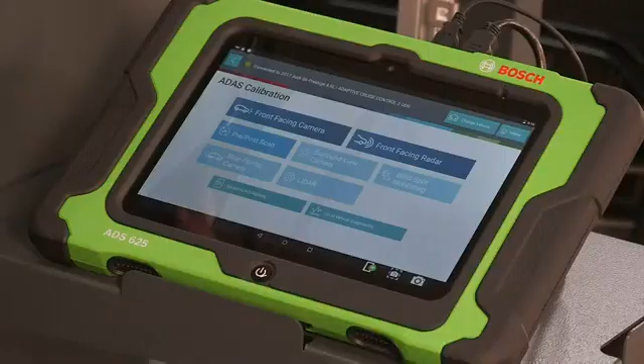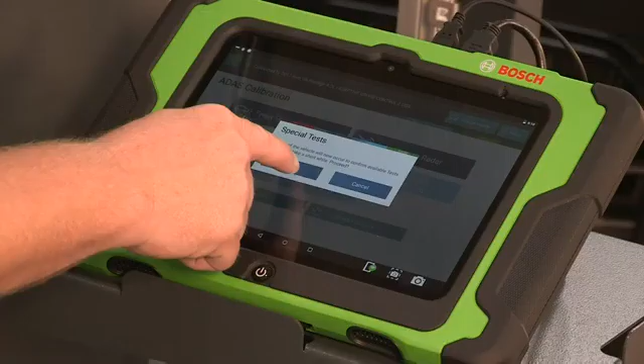Let's learn how to do a front-facing radar calibration using the Bosch DAS 3000 and the ADAS 625 scan tool. The scan tool will now scan the vehicle to determine which tests are applicable for the vehicle. Press OK to continue. Select ACC sensor adjustment to calibrate the adaptive cruise radar.

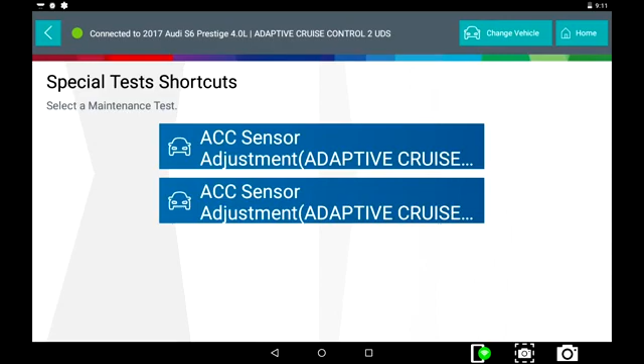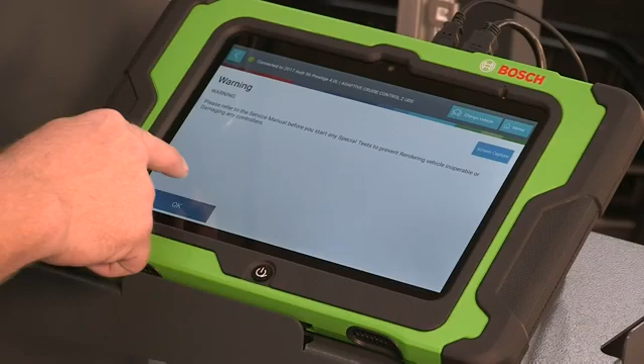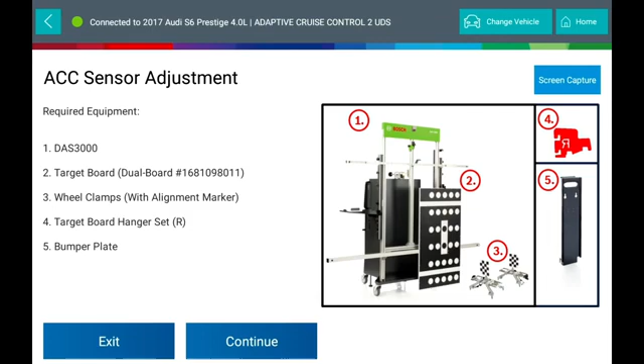Refer to the manufacturer's service manual for applicable warnings and follow these to prevent disabling a system. Press OK to continue. You will need the following equipment to perform this calibration: DAS 3000, target board, wheel clamps with alignment markers, target board hanger set, and bumper plate. Press continue to proceed. Before you begin the calibration, turn the ignition key on with the engine off.

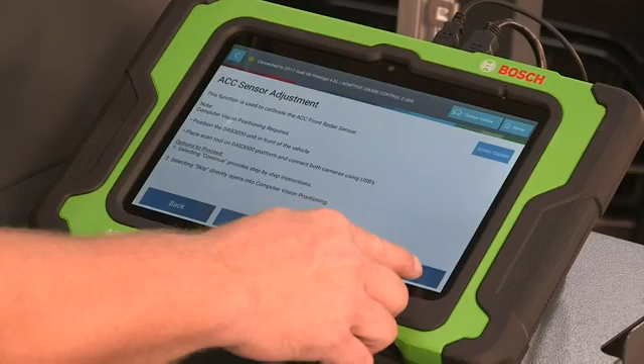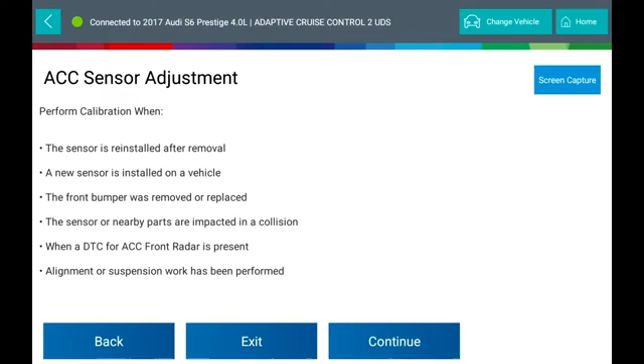Press continue to proceed. Perform calibration when the sensor is reinstalled after removal, a new sensor is installed on a vehicle, the front bumper was removed or replaced, the sensor or nearby parts were impacted in a collision, when a DTC for ACC front radar is present, or alignment or suspension work have been performed.

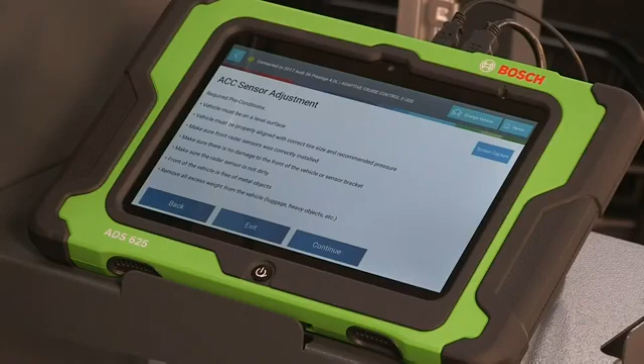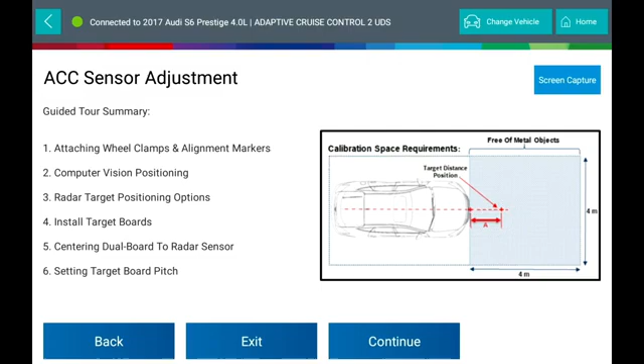Guided tour summary: attach wheel clamps and alignment markers, computer vision positioning, radar target positioning options, install target boards, centering dual board to the radar sensor, setting the target board pitch. Press continue to start the guided tour setup procedure.

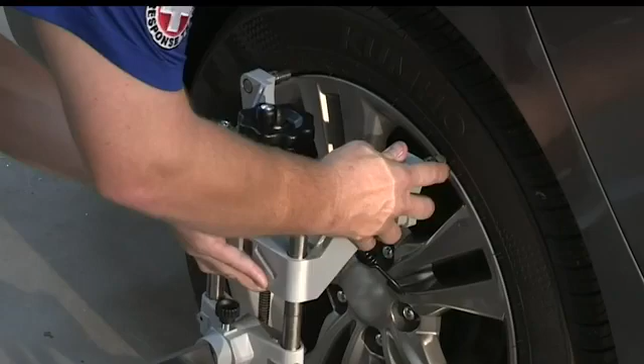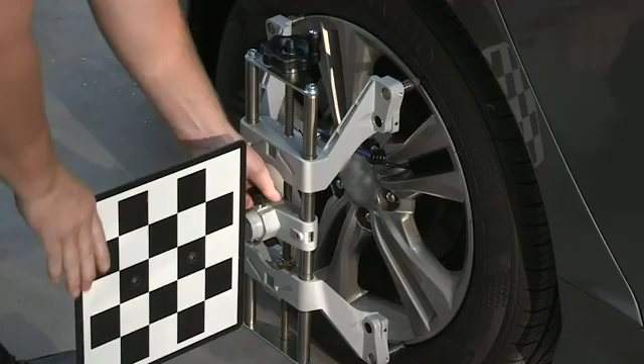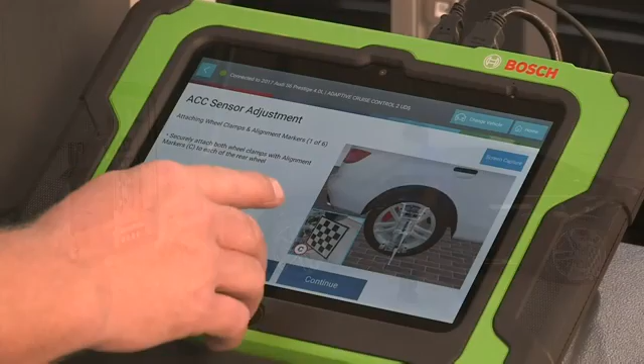Attach the wheel clamps, one on each of the left and right rear wheels. Place the grabbing hook at the top of the wheel and slowly tighten the wheel clamp. Don't forget to attach the bungee cords to secure and prevent the wheel clamps from falling off. Straighten the target so that it is perpendicular to the floor. Securely attach both wheel clamps with alignment markers to each of the rear wheels. Press continue to proceed to the computer vision positioning.

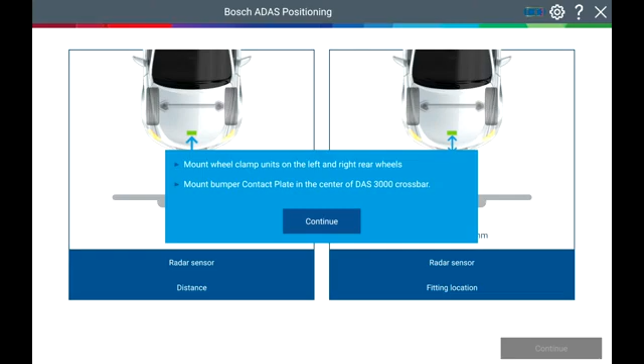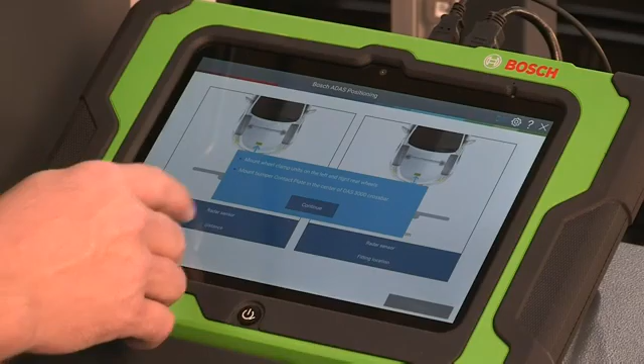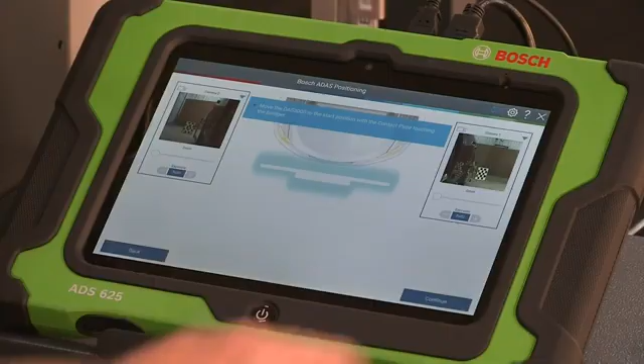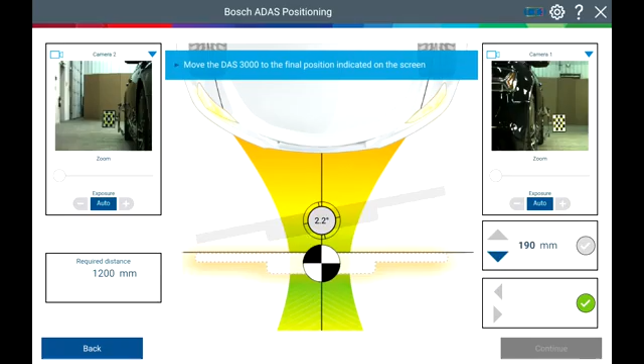Install the bumper contact plate onto the DAS 3000. Select continue. Using the BAP Bosch ADAS positioning cameras, push the DAS 3000 up to the bumper. Select continue. Slowly move the DAS 3000 back until the horizontal bar turns green and the DAS 3000 is in the correct position. Select continue.

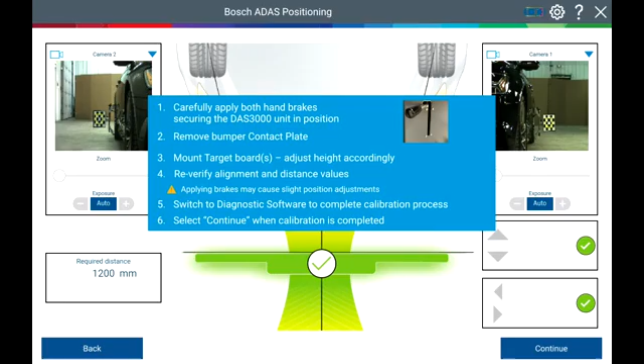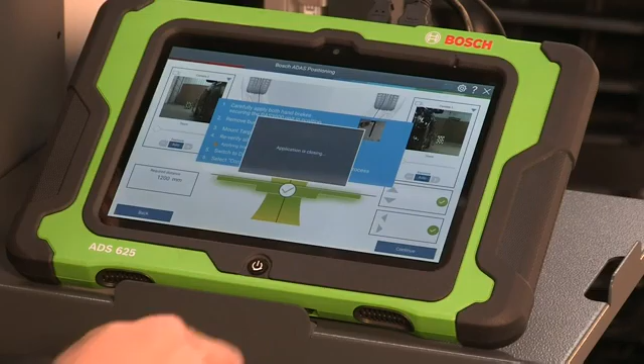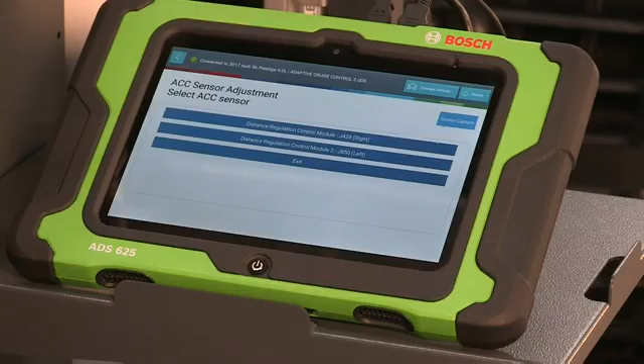Once you are in position, apply the left and right brake to the floor to secure the DAS 3000 in position. Press continue to move to the next step of the guided tour. The BAP camera app will now close. Select Distance Regulation Control Module J428 right side. You will be prompted to position the target board red hanger and then hang the target board.

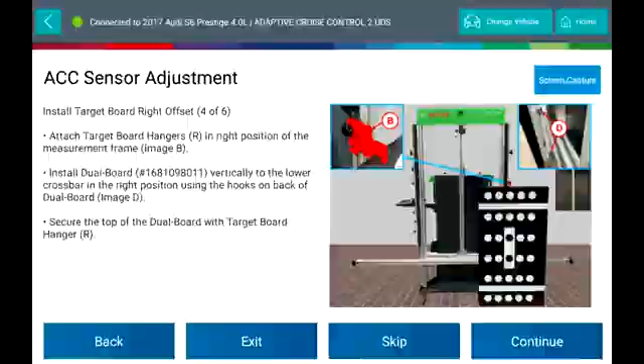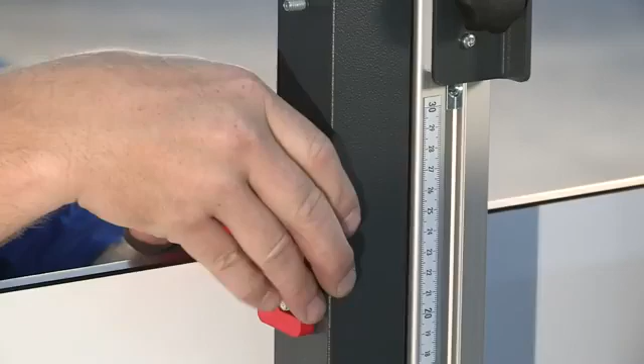Install the target board at the right side offset. Attach the target board hangers in the right position of the measurement frame. Install the dual board vertical to the lower crossbar in the right position using the hooks on the back of the dual board. Secure the top of the dual board with the target board hanger. Be sure the target is hung on to the crossbar with the hook at the bottom of the target board. Press continue to go to the next step of the guided tour.

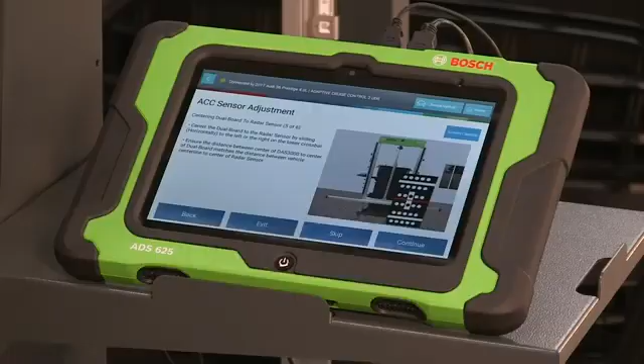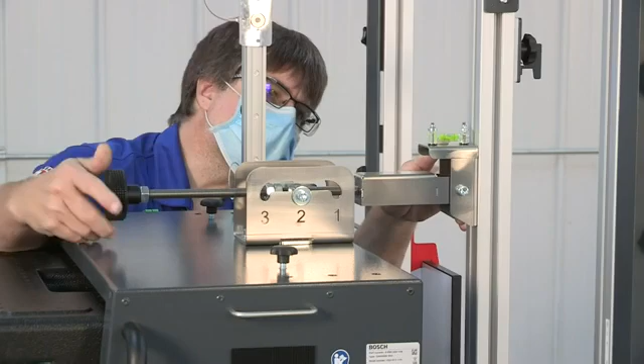One of the final steps in this part of the process is to set the pitch of the target board to the correct angle. Press continue. Be sure that it is in the correct notch, number 2, and the bubble is in the center of the 2 marks on the spirit level. Now we will perform the actual calibration. Press continue.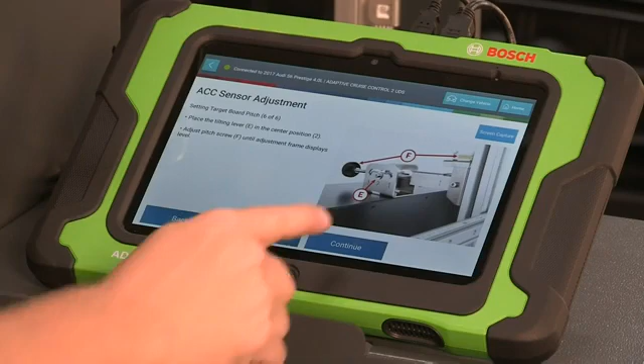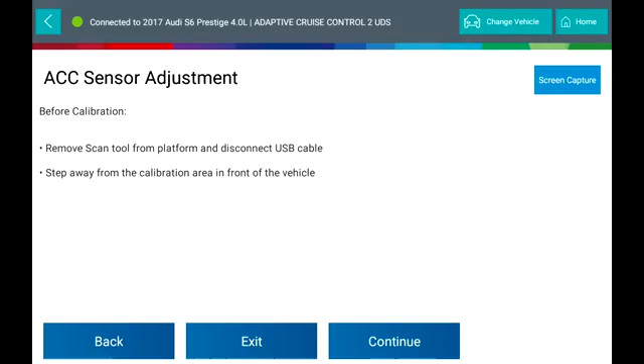When calibrating any component, you must always remove the scan tool away from the platform. Please be sure to disconnect the USB cables first. Press continue. Notice, ensure that nobody enters the area during the calibration. Do not turn off the scan tool or the ignition switch. Do not move or shake the vehicle during calibration. Close all of the doors. Press continue to begin the calibration procedure. Note the sensor misalignment angle. Press continue.

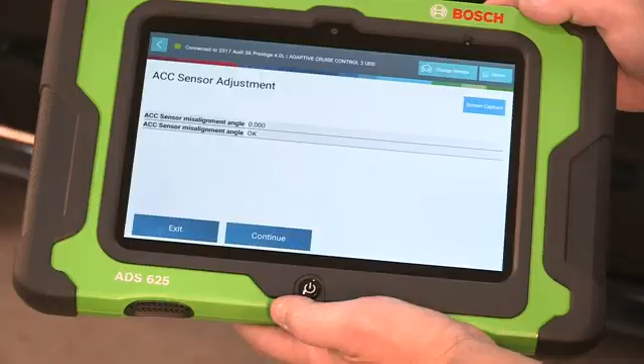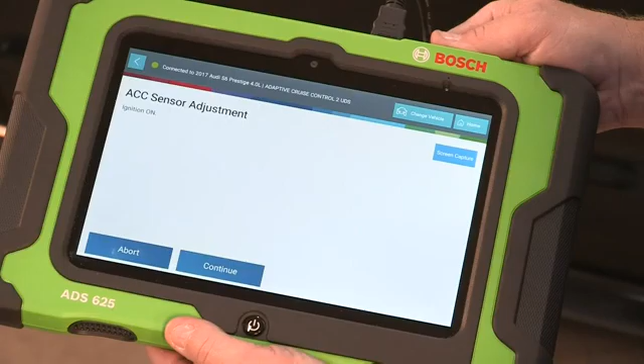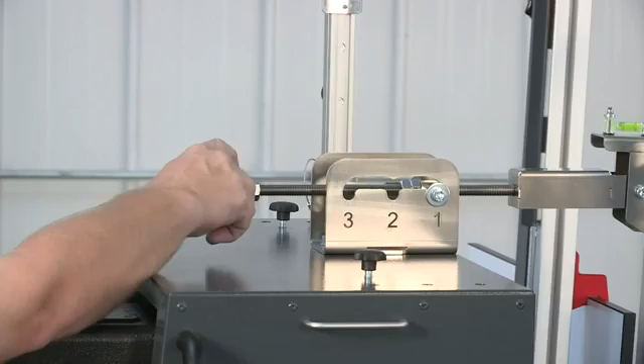Turn the ignition switch off and ensure you close the driver's door every time. Press continue. Turn the ignition key to the on position. Press continue. Now we will go and set the target board pitch to the number 1 position. Move back out of the way of the radar. Press continue. Let's go back to the target board pitch and move it to number 2 position. You always move back out of the way of the radar each time you do the calibration. Press continue.

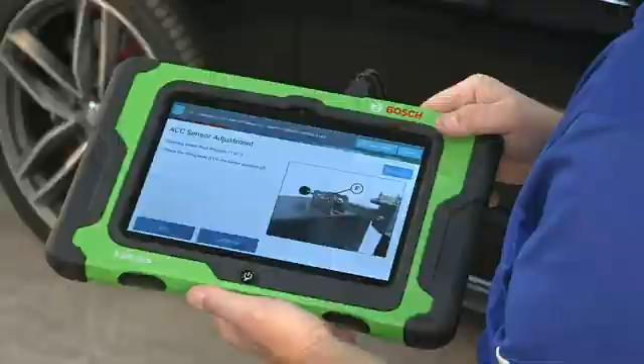Again, go back and move the target board pitch to the position 3. Move back out of the way of the radar. Press continue. Note, the vehicle did not pass the calibration and the radar must be adjusted. Once you are ready to make the adjustment on the vehicle radar sensor, you will turn the top adjusting screw 0.75 or 3/4 of a turn to the left and the bottom adjusting screw 0.5 or half a turn to the right. The Bosch ADS 625 tells you these adjustment amounts.

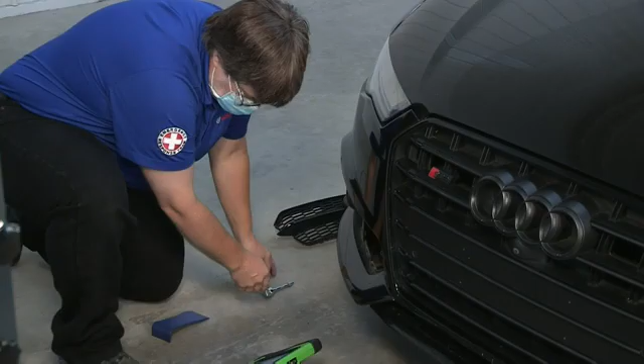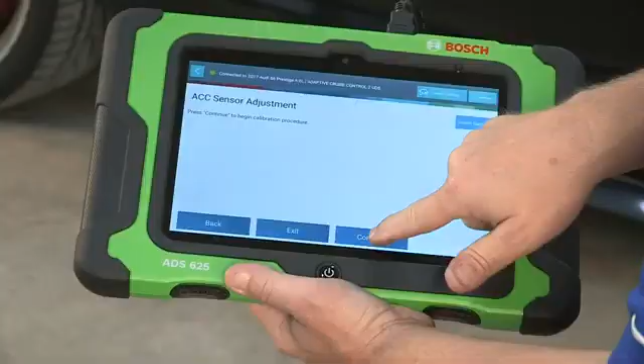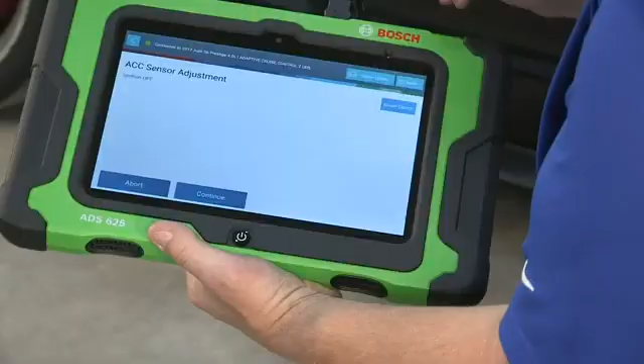Review the adjustments on the ADS 625 scan tool and adjust the screws to specifications listed. Answer the question as shown, yes. Move back to the left side of the car out of the way of the radar and press continue. The ACC sensor misalignment is at 0 and at the correct angle. Press continue. Turn the ignition switch off. Press continue. Turn the ignition key on. Don't forget to close the driver's door.

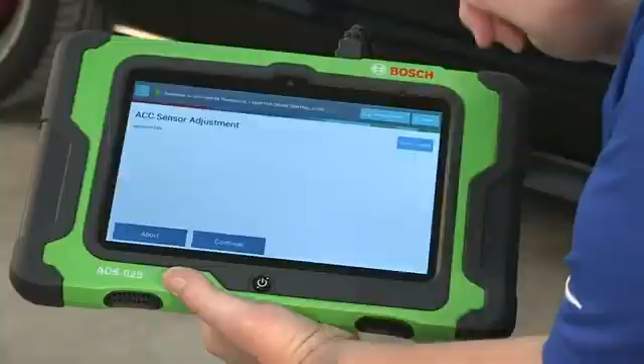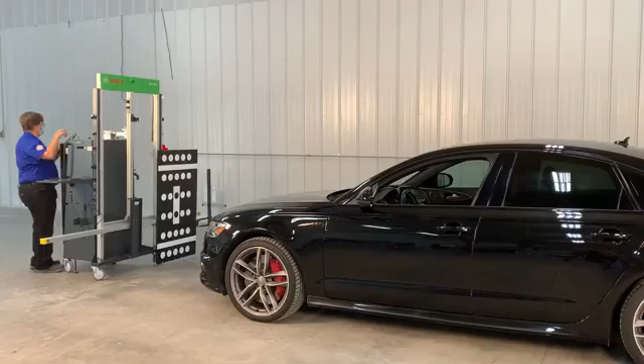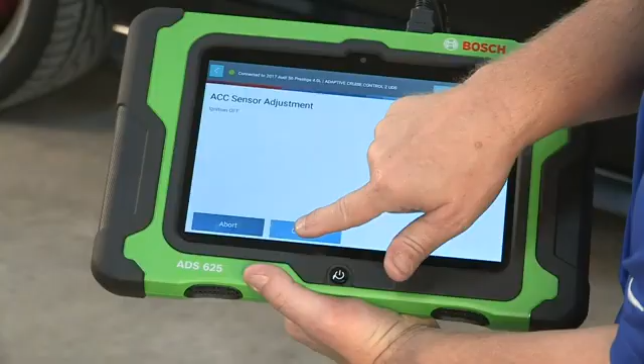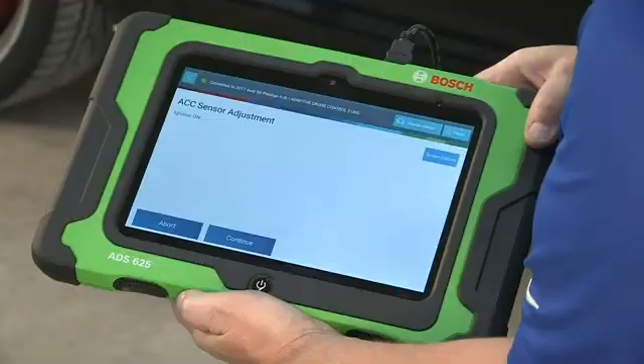Press continue. Now we will go and set the target board pitch to the number 1 position. Press continue. Turn the ignition switch off. Press continue. Turn the ignition key to the on position. Press continue. You have just successfully adjusted and calibrated the right side ACC Adaptive Cruise Control radar sensor. Please be sure to check for DTCs once you have completed all of the radar calibrations.

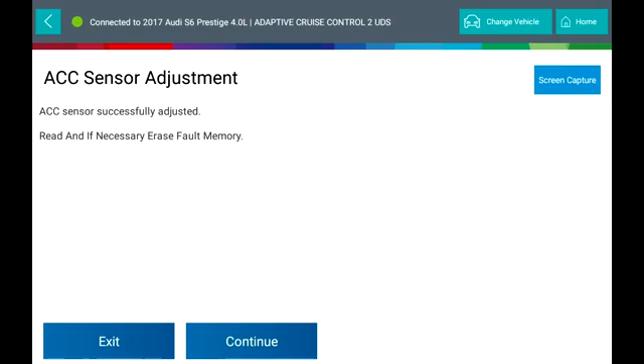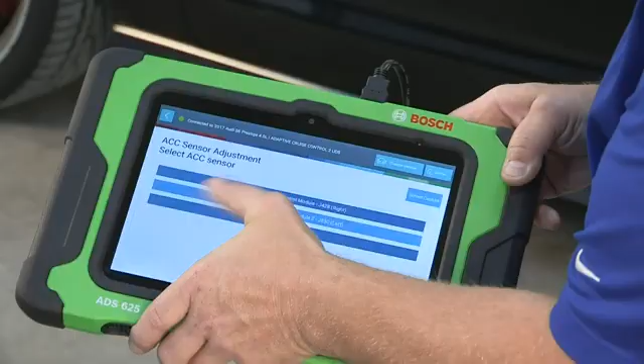Press continue. Now you must do the left side. Select Distance Regulation Control Module J850 left side. Follow the steps of the guided tour just as you did for the right side sensor to calibrate the left side radar sensor.